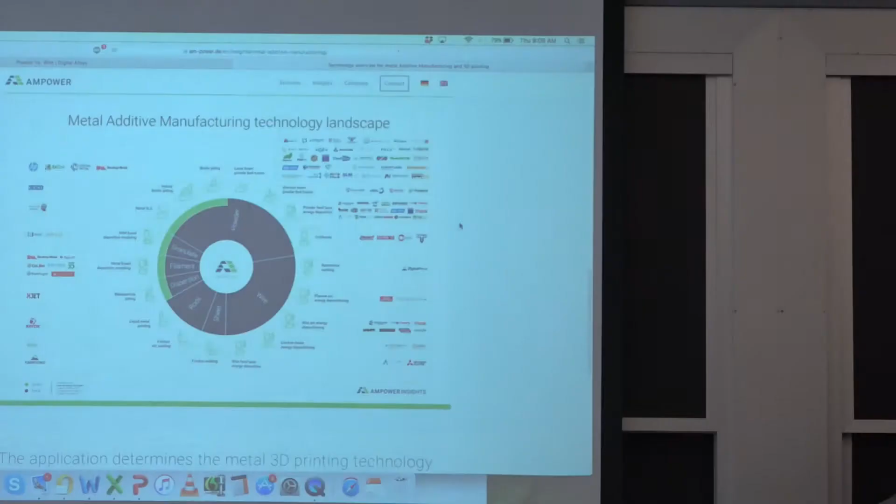We're still sort of in stealth mode, if you will. We haven't fully commercialized the process yet, but we're pretty open to talking about how it works and the markets that we see as immediately attractive for it. So that's a little background. Let me share with you guys an overview of the metal additive space from my mind. Feel free to raise a hand or interrupt me if you have any questions -- I want to make this more of a discussion than me just talking.

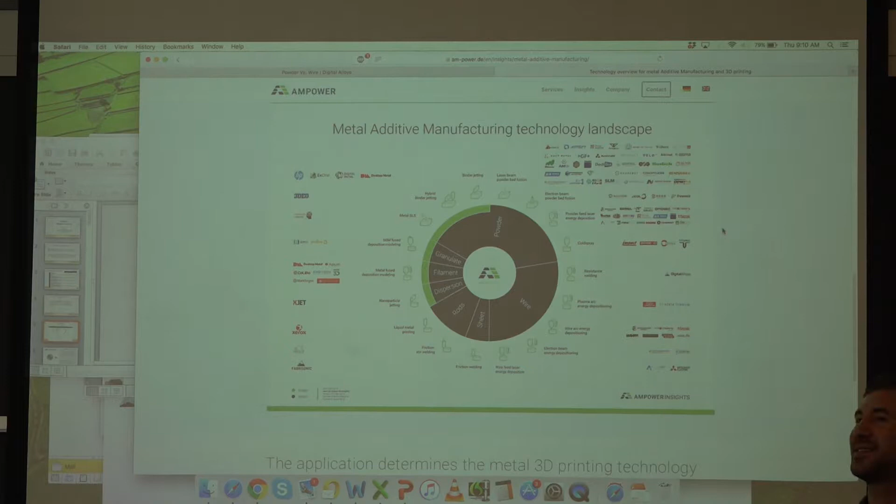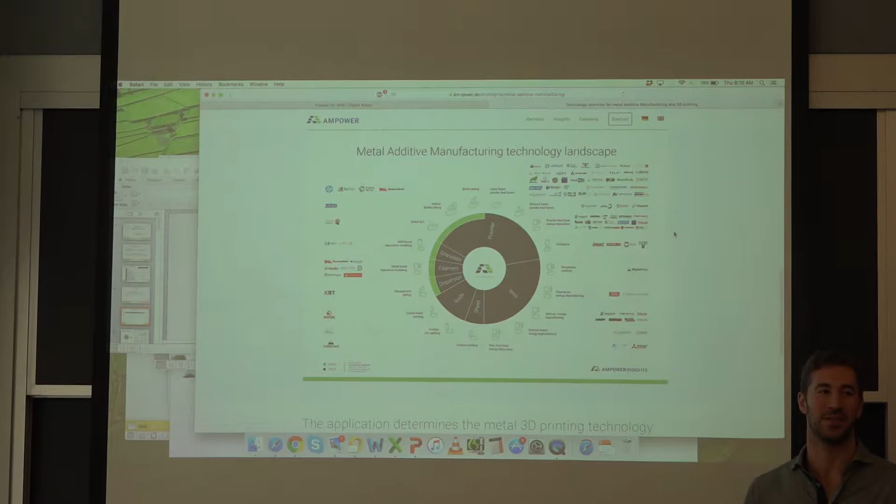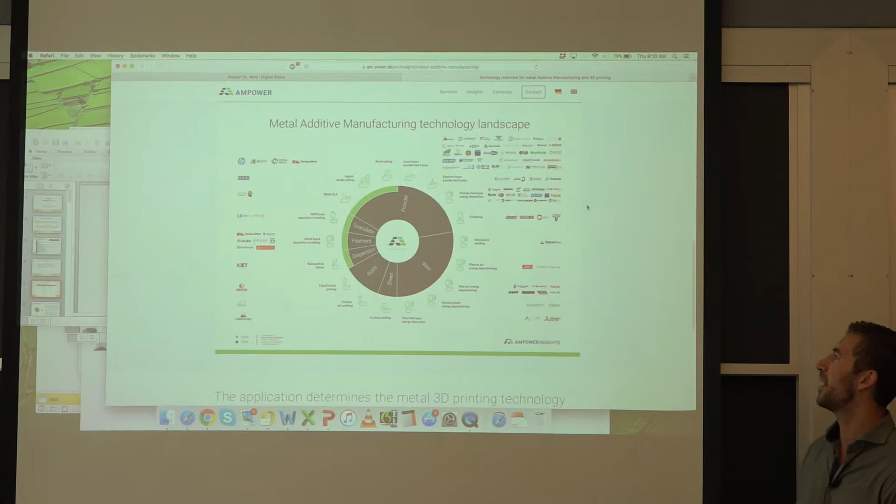A lot of people think about additive manufacturing as just one manufacturing process, one category. Really, it is a lot of different manufacturing processes, and just like in conventional manufacturing, each one has its own pros and cons and applications that make sense for it. When we think about metal additive, there's something like 15 different ways to additively manufacture, 3D print metal. This is from a consulting firm out of Germany that put this together.

I like the way they broke down the different technologies. Starting in the center, the brown represents the metal material. The green represents processes that use metal in combination with a binder, and you can see it's broken down by feedstock. So wire-based processes—a lot of these fall under direct energy deposition, DED. Our process, our logo, is here under this resistance welding category, and I'll get into more of how our process works.

There's powder-based processes—a lot of these were some of the first metal 3D printing processes, officially called 3D printing. Professor Eagar and I were talking about how, in theory, additive manufacturing has been around for 80 years or so, if you consider just welding one layer on top of another. But from the perspective of this new 3D printing industry, it really started with laser powder bed about 20 years ago, out of research in Germany with lasers and powdered metals.

Then there's companies like Desktop Metal, also based in Burlington—neighbors, with a lot of ties to MIT—doing things with binder and metal powder. There are also niche, interesting processes that use large rods of metal doing friction stir welding, basically spinning rods to generate heat to melt the metal in contact with the substrate. And there's things like ultrasonic sheet welding, where you're binding whole layers on top of another. So my point is there's a lot of different ways to process metal under this category of additive manufacturing.

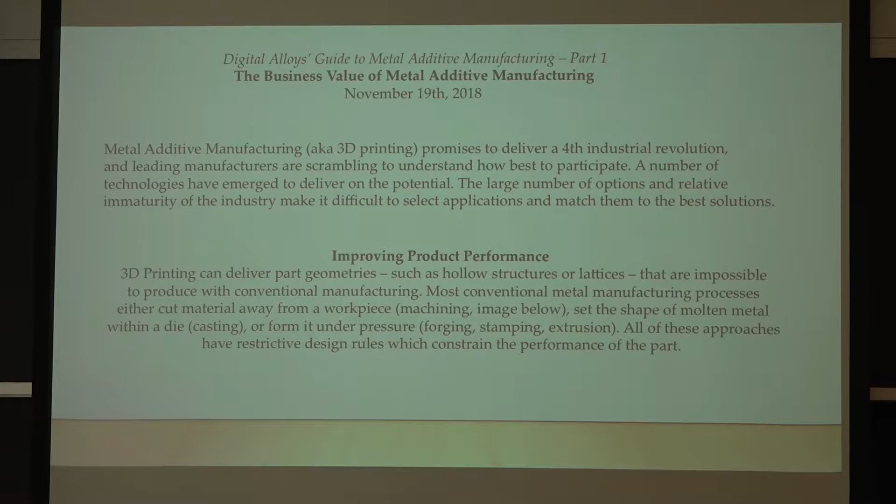Professor Eagar basically grabbed a lot of snapshots from this blog series that I've been writing on behalf of our company for the last year or so. I'll talk through some of the highlights here.

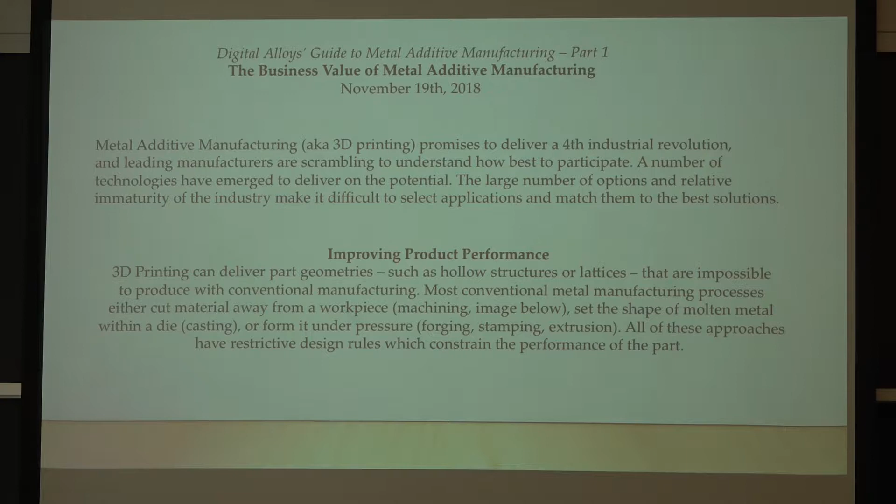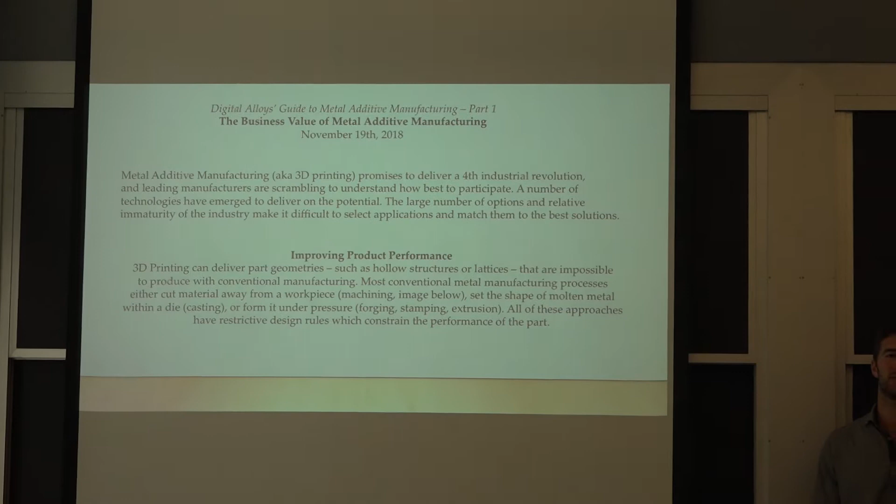Starting with—I think a lot of times when you look at a manufacturing process, from my perspective at least, you really have to start with the business value. What does it do that's unique? What does it do that's valuable? I know that's not necessarily an academic perspective—normally you want to start with how it works and why, and what the physics are.

But from my perspective, working with companies in the industry, everyone is excited by this concept of 3D printing. But at the end of the day, it doesn't really matter if they're not able to use it and it's not able to make some real impact to their business. Coming from that perspective, they really think about 3D printing as another manufacturing process—albeit a newer, more hyped, sexier process—but they think of it as a manufacturing process.

So what are the costs? What materials can it process? What designs can it enable that we couldn't produce before? And how valuable could those designs be to our customers, to our products? And what does the whole process look like—is it something we could really integrate into a factory we're running, or something we'd purchase from a supplier? And just building expertise in the process to understand how it works.

On the topic of value drivers from a business perspective—everyone's using 3D printing for prototyping. Any established company making a physical product today has a handful of 3D printers, and they're all using it early in the design stage to make concept models at least. A good amount are also doing real functional prototyping, assuming they're making a product where there's a technology that can get them close enough to how the final product would be made and function. A lot of companies are also using it for what I'd just call manufacturing tools.

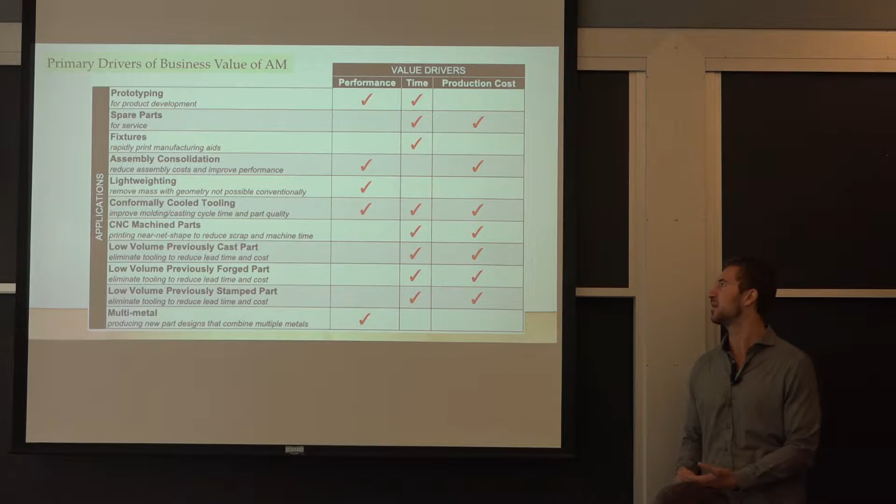And then there's people that are looking for sort of a lot of advanced design that they get from 3D printing. So things like lightweighting are especially important to industries like aerospace, industries like automotive, because the weight of a part is not just the cost of the material that went into it. It's really how that product's going to perform. And there can be a lot of cost savings and performance benefits from removing weight from that part through designs that you can achieve through additive.

Conformally cooled tooling. I guess quick show of hands, does that term mean anything to anyone? A few of you guys. So in a lot of tooling processes, as in injection molding, die casting, are people familiar with those sort of general manufacturing processes? The rate limiting step is really how fast you can cool and solidify the material in a mold. And that sort of largely constrains the economics of the process.

So 3D printing has been used. It's still sort of niche because it's been so expensive, but it's been used and proven quite a few times now in these processes where you can put cooling channels into a part that conform to the surface of the tool, that's why it's called conformally cooled tooling. That allows you to really optimize the cooling, to remove heat from the plastic part in the mold or the metal part in a die as quickly as possible and in a uniform controlled way in order to solidify, finalize that part, pop it out, and start producing the next one.

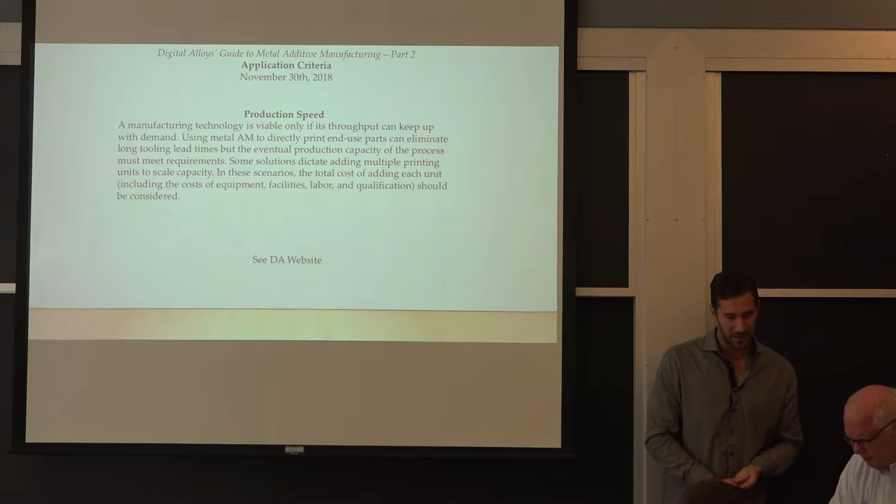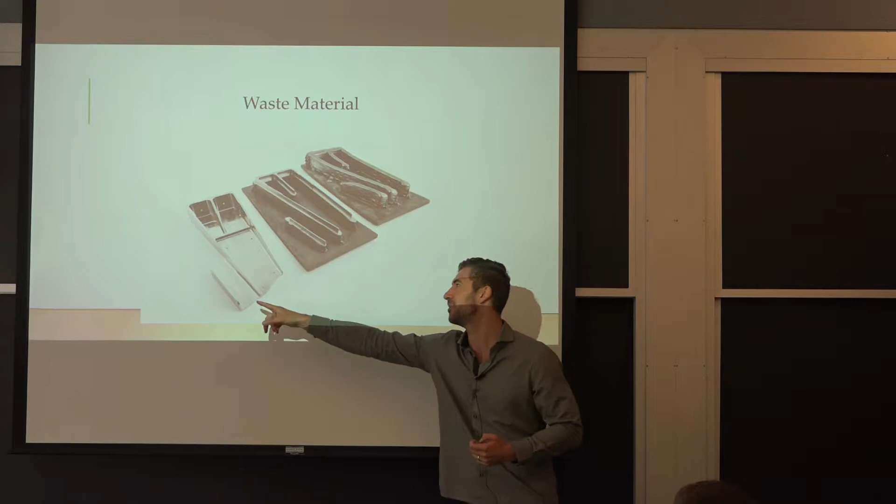Yeah, I don't know if you grabbed that one. But so one reason Boeing invested in us is to think about how they can improve their... Here's a good example of one. To start out with a big block and then machine this part, you can imagine how much waste there is. And so companies like Boeing look at 3D printing as a way to save money, save time potentially. If you can print this faster than you can machine this from billet, potentially there's time savings too.

But also just sort of the environmental footprint. They think about the energy use. There's a ton of energy that goes into producing the primary material, especially with a material like titanium. So if you can reduce a lot of that scrap, you can reduce your energy footprint too. And then of course, if you can make a lighter part that goes into the plane, the energy savings there can be massive. Oh yeah, so that's a good example there.

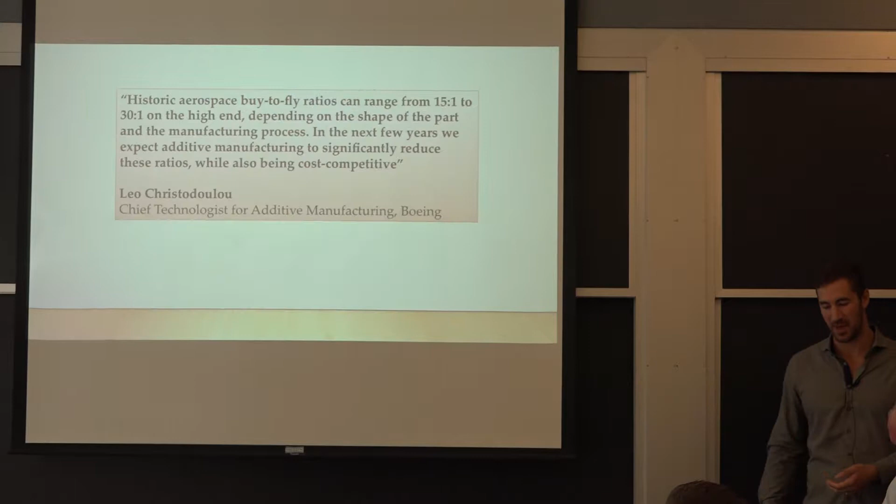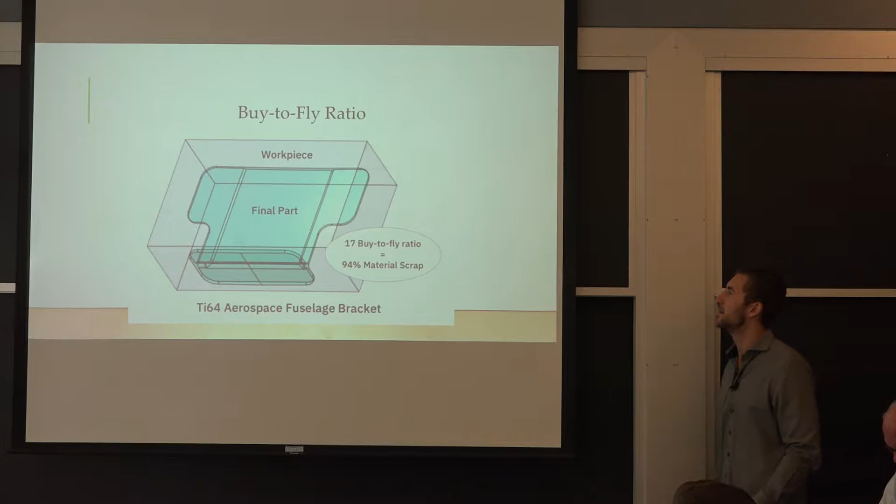Oh, which one? I was just going to say this is a good example of a part that we're working on with a large aerospace manufacturer. And it may seem ridiculous, but a lot of companies, they'll start with this, like a 7-kilogram block, and end up with a half-kilogram part through machining. There's a lot of parts like that on a plane.

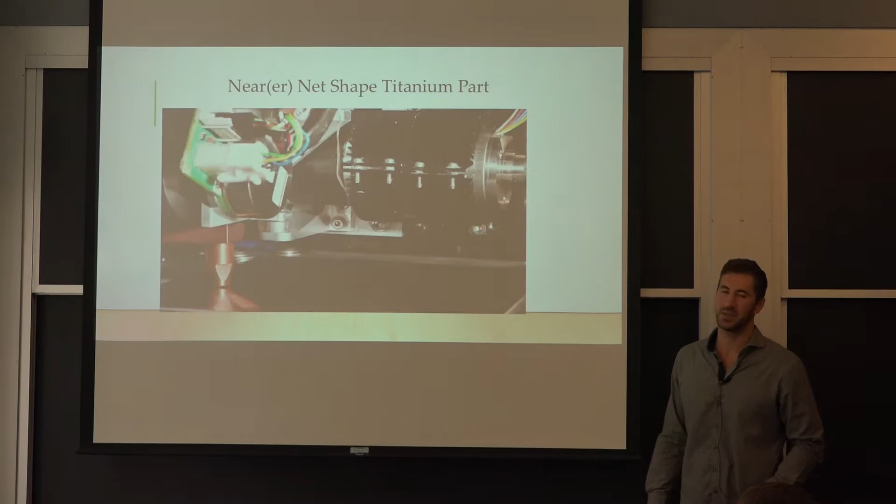Here's your time savings. Yeah, and in terms of time savings, to think about CNC machining, you not only have to develop a program to make the final part, to control that end mill, but you also have to develop some pretty complex tooling to hold that part while you're machining it. And so it's sort of a two-step process. And it's a lot of programming, a lot of design, and a lot of just waiting to receive materials, waiting for materials to be machined.

It's kind of like a chicken or egg thing. You have to machine a fixture to hold your part before you can machine the actual part. And so it's not an efficient process. It is a process that can get you to a very accurate, valuable part at the end of the process. And it's used in conjunction with a lot of processes because it can produce very smooth surfaces and accurate features.

There's a question over here. Yeah, I'm curious, so you mentioned like a big box of titanium. I agree you can definitely buy that stock. Is it easy to buy huge amounts of titanium wire stock? Like what else is it used for? Because it probably wasn't developed for your process.

Yeah, good question. So I haven't really got into our process yet, but titanium wire, thanks to the welding industry, is something that is what we call commercial off the shelf. It's used by a lot of manufacturers currently to do welding and joining and repairing operations. So that's like titanium filler for some other TIG or MIG welding process? Exactly. So you can buy big spools of this stuff from hundreds of different manufacturers. It is more expensive than billet.

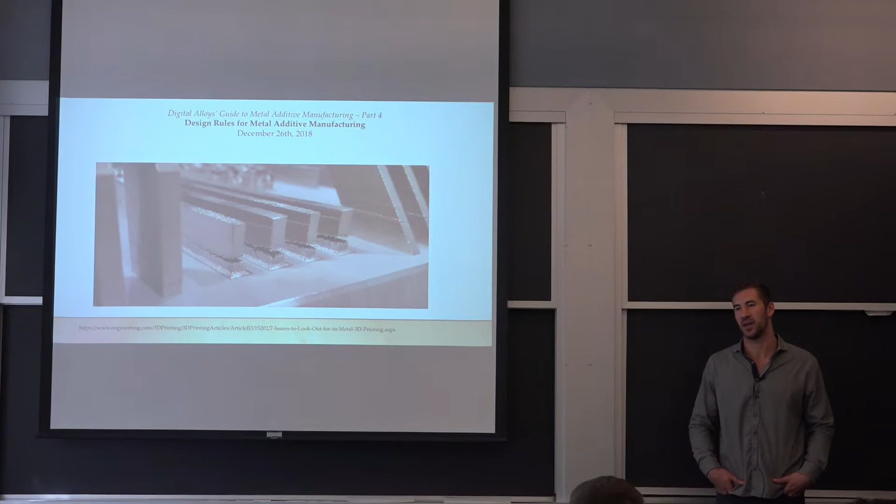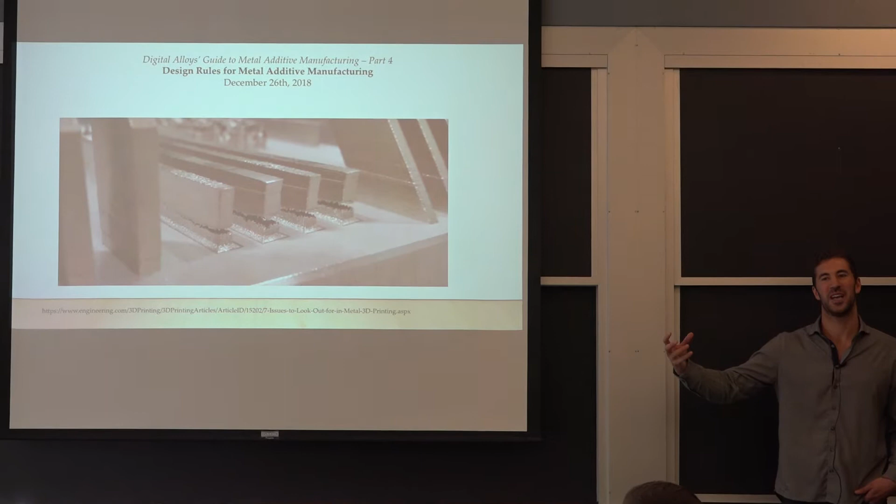There it was. Anyway. So let's talk a little bit about some of the different processes and the thermal management component of it. This is a huge thing in metal, in any manufacturing, but especially in 3D printing. When you're melting metal, it expands, and when you cool it, it contracts. And when you have one section of your part that's very hot and one that's very cold, you start to deal with a lot of internal stresses. With a lot of additive manufacturing processes, parts will literally tear themselves in half, especially along layer lines where there may not be great fusion and strength.

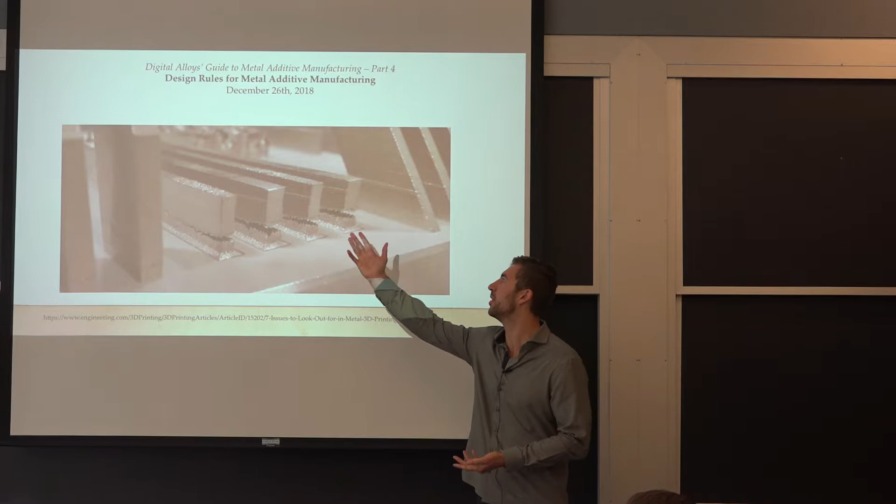So this is an example that's not atypical in 3D printing, where you'll have a powder bed build that will tear itself apart, and so this is a large factor when you're thinking about how to design parts for the process, how to orient parts within a build, how to support them and how to optimize parameters for a build. Different metal additive manufacturing processes create different amounts of heat loads and residual stresses like this. Another factor with thermal management is the effect on the grain structure and the crystals in the final metal part.

A lot of really high energy processes will start to see what is called columnar grains, where a lot of heat penetrating into the part will create anisotropic crystal structures, which most industries do not want to see. Someone like Boeing wants a part that is isotropic, equal strength, equal properties in all directions, because it's easier to design for and easier to validate. It's one of these dirty secrets about 3D printing that a lot of people don't talk about, but people that use the technology are very aware of it. Yeah? So I would assume that some materials are more sensitive to variation from process to process type.

Yeah, in microstructure, can you comment on that? Yeah, I'm not an expert there from a metallurgical perspective. Some materials, there's a reason why a lot of materials just have not been printed, and probably cannot be printed with a lot of processes.

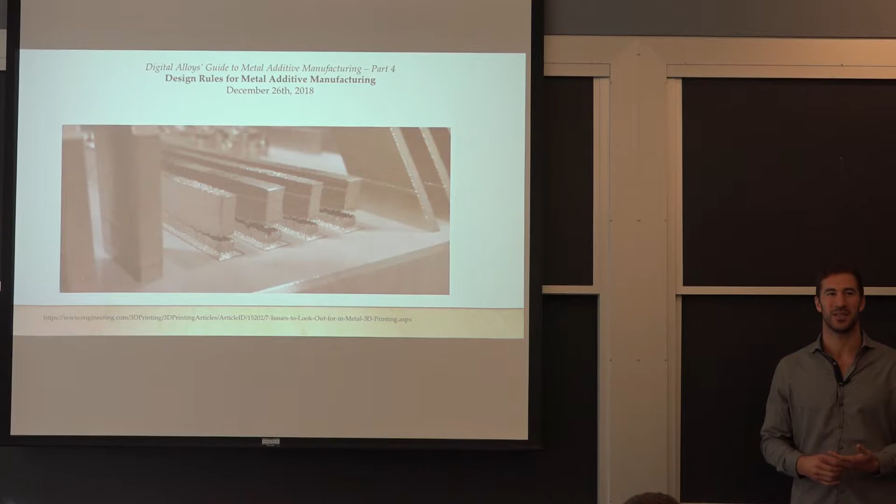When you look at aluminum, one of the most widely used materials, powder bed processes have really only been able to process casting grades of aluminum, which are typically lower strength. They haven't been able to process typical aerospace grade high strength aluminums because of issues with cracking and this kind of thing. Do you have anything to add to that?

It gets very metal specific. Steels are not a problem, but most steels are not going to be the high value added parts unless you're getting to high alloy steels. In fact, you might want to mention something about your tool steel type of stuff.

Titanium is certainly a niche in the medical business and the aerospace business. Nickel alloys that are high value added alloys cost $200 a pound anyway, and they're going into high temperature applications. So you really have to look at the metallurgy of the whole thing before you even start.

Frankly, that's one of the problems with people who are trying to do carbon steels or brass eyeglass hinges. There's just not enough value in those metals to be able to justify the expense of pixel by pixel manufacturing. Yeah, so why don't I use that as a good segue to explain what we're doing.

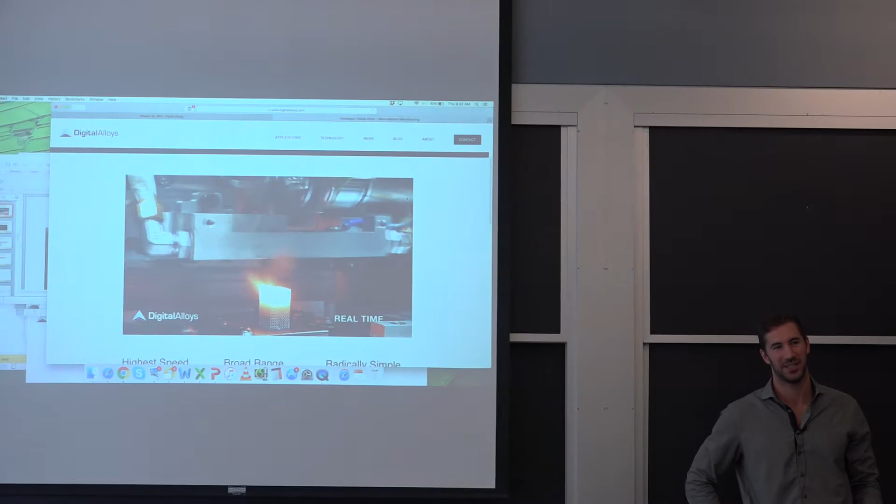How it works, and how we're thinking about the applications and industry and adoption of this technology. So at Digital Alloys, we've created a new metal manufacturing process called Joule printing. We call it Joule printing because Joule, a unit of energy, because of the translation from Joule heating, basically resistive heating, just like a coil in a toaster.

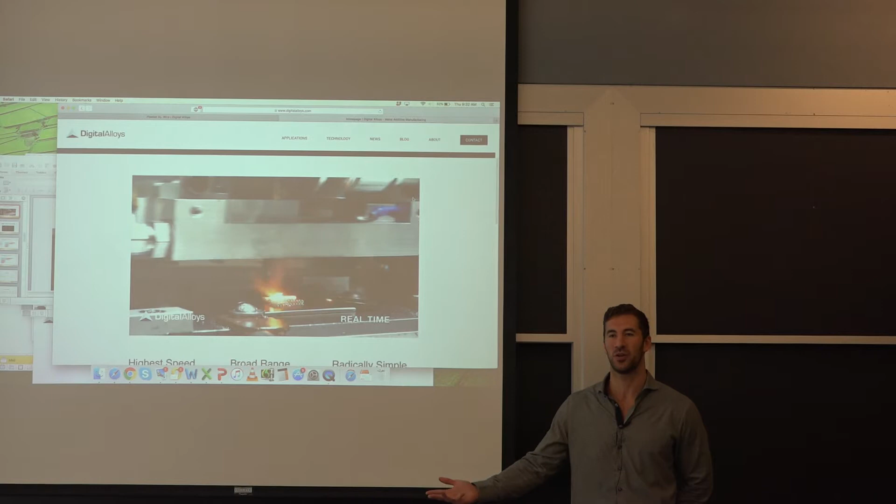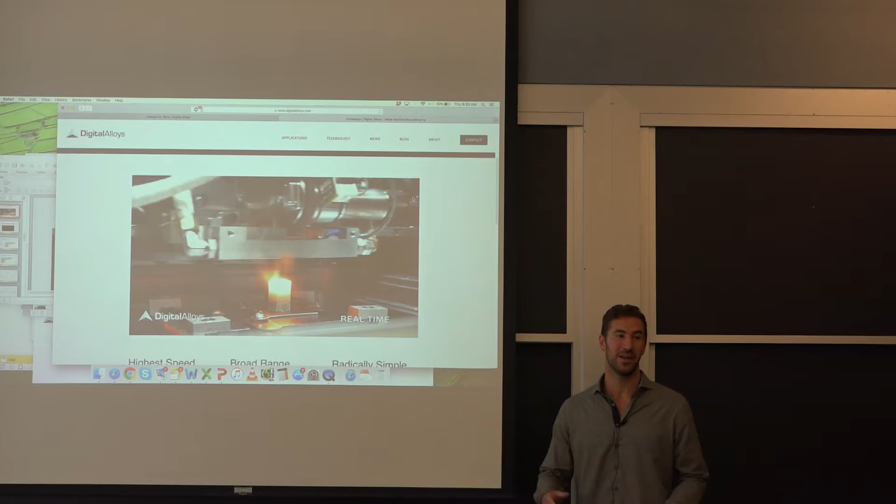We take a welding wire, which we discussed earlier, which is great because you can find it in a lot of different metals. A lot of people manufacture it, you can get high quality, low cost. Compared to powders, which is how most metal additive manufacturing is done, it's a lot safer. A lot of companies don't like dealing with powdered metal because it's a risk of inhalation, a risk of flammability because of the really high surface area, and it's prone to oxidation.

I'm curious, is this actually a titanium part you're printing right now, or is it some other material? Yeah, this is titanium. Is this done in an oxygen-free environment, or in the atmosphere? So what you don't see is the bigger printer behind this. This is in argon. So we have a chamber, and we purge it with argon.

Would it be on fire otherwise? Yeah, it would be heavily oxidized. You'd lose a lot of strength in the material, it would look funky colors. I don't know if it would catch on fire, but it could, maybe, if there's some oxygen in there. If it was powder, you could start a flare in there and just burn the whole glove box down.

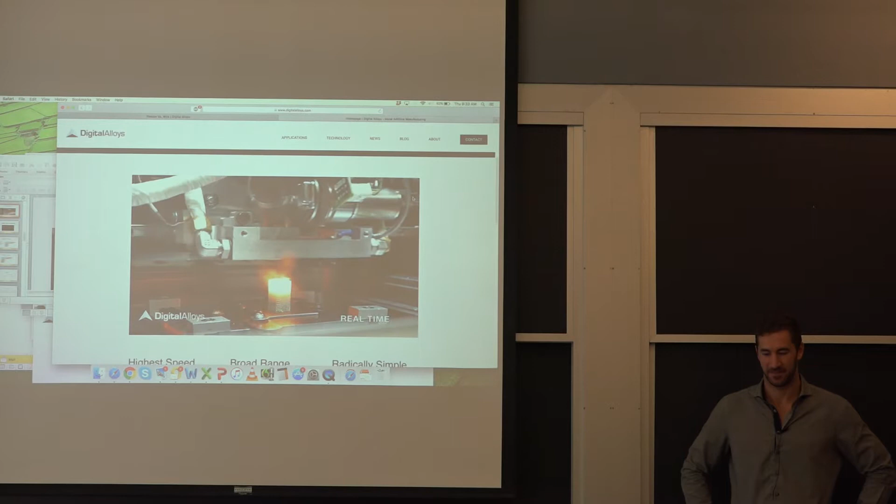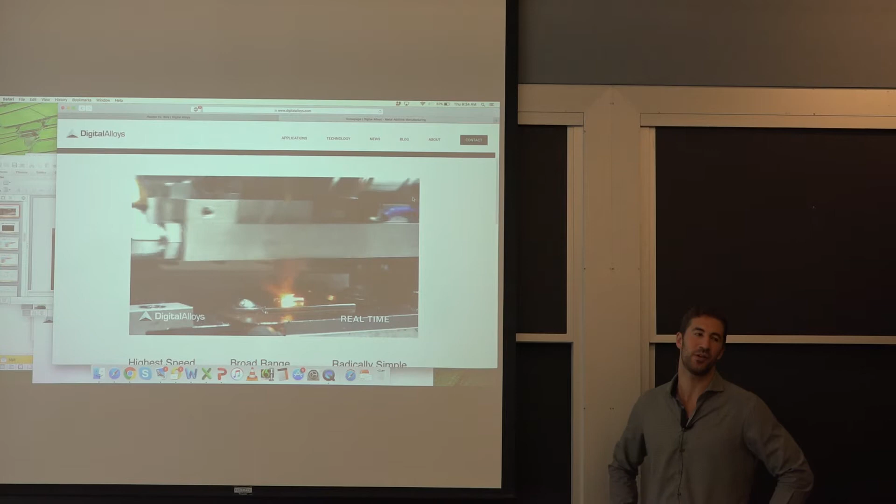As you can see, it gets very hot on top, and titanium has a very low thermal conduction. Do you have any issues getting the heat out of the part? Like you could have some super long, narrow part that just stays super, super hot and doesn't shed heat. Yeah, it's a big part of our development right now, figuring out thermal management.

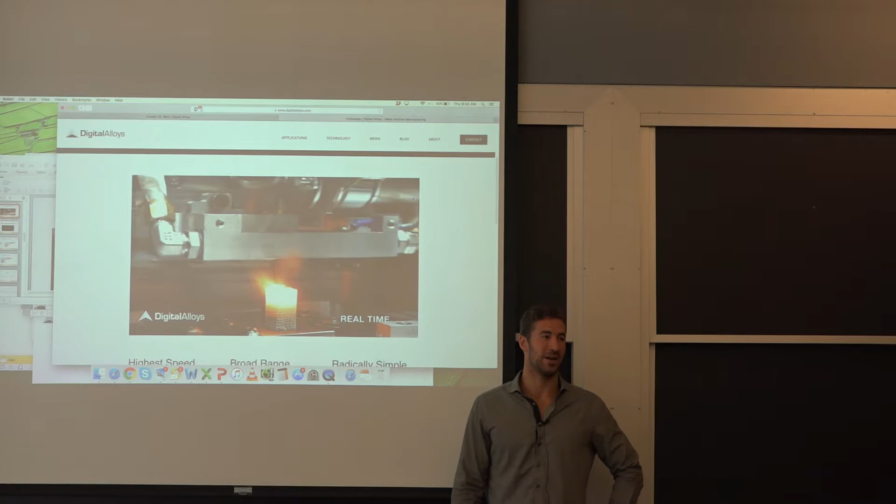A lot of times it's figuring out, what you see here is what we call printing on a cold plate, so it's just room temperature, ambient environment. It's really hard to get good fusion to a cold plate with molten metal. So we're playing with ideas like, do you heat up the plate, do you heat up the whole chamber to maintain that thermal environment and reduce the thermal gradients? Frankly, it's something we're still figuring out, and it's very geometry specific, like you said.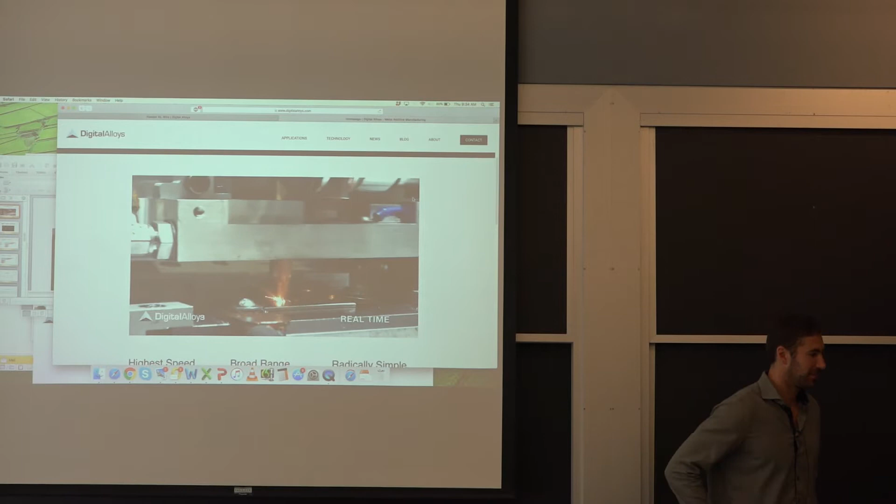In fact, I originally thought one of the big problems was going to be getting the heat out. But when they started doing this about a year or 15 months ago, the big problem was they didn't have enough heat in. So it just radiates too fast? The metal has too much thermal conductivity, it sucks the heat out, and so they weren't getting good fusion. They were getting porosity in the final part, between the layers.

And it turns out, it amazes me that you can have a machine that slews that fast, but they just sped up the machine to go faster, and they solved the heat problem. And so now they can get 100% dense.

But again, you're going to have some problems with residual stresses eventually. They could not make that as a 6-inch by 6-inch part without getting cracking. Not today, not without really heating up the whole environment and the plate.

We have, I guess, a good problem compared to the opposite: the faster we print, the easier it is, because we're printing on hotter metal essentially. With most manufacturing processes, the faster you try to go, the more complications arise. With our process, it's very hard to print slow because it's hard to print on a cold surface. It's hard to get good fusion, and it's hard to dump that much energy into the process without destabilizing it. That's why we like materials like titanium, because they have low conductivity of heat.

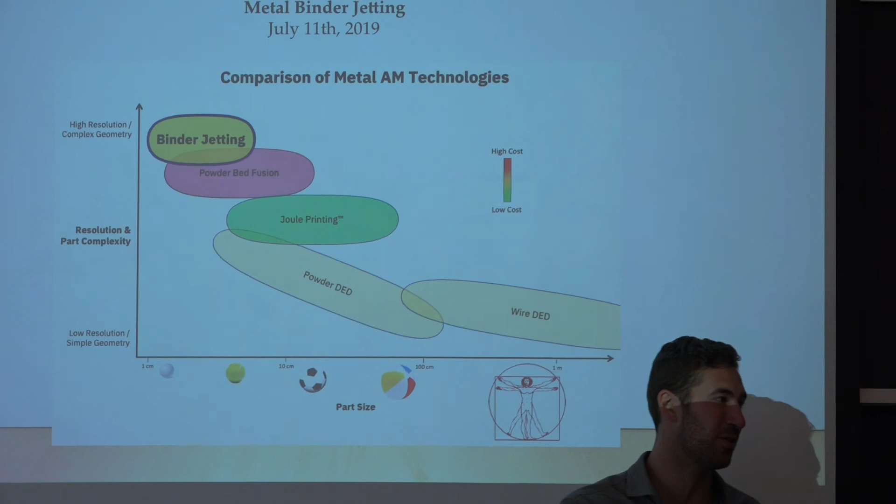Right now our first printer we think makes sense for parts between the size of a tennis ball and a beach ball. You look at a company like Desktop Metal and their binder jetting, and we think it makes sense for much smaller, thinner parts, because you've got to remove all that binder and then get it down to density. Then you have your bigger, more welding-type processes where you're laying down a hot-dog sized bead of metal in some cases, where it's only going to make sense for big, simple, large structures, mostly aerospace and industrial structures.

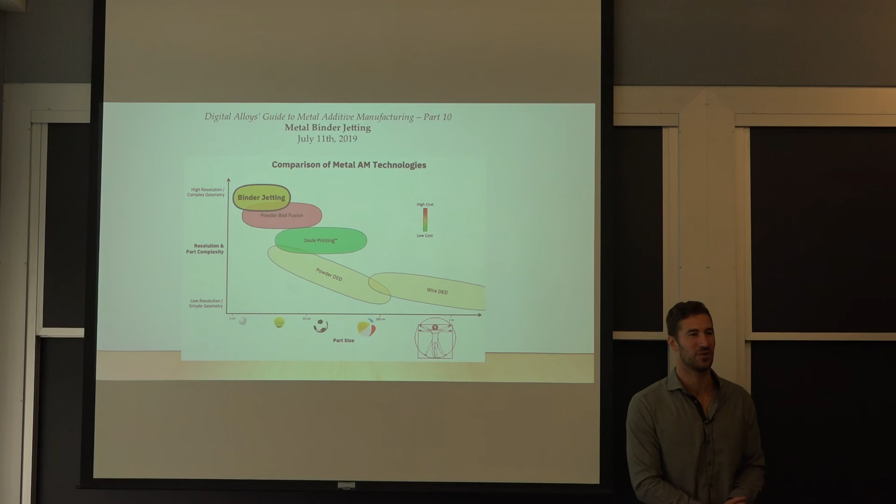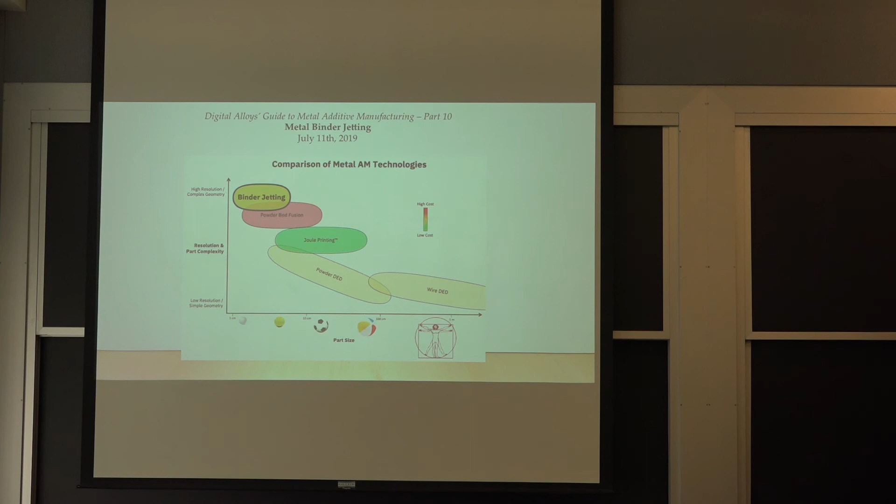If you wanted to push your volume up to a larger scale, could you do it with a larger wire, or would you just run out of heat input? We think we could even do it with a current wire. It's just that you have to start somewhere, right? We had to build a machine starting somewhere. We chose a size that we thought was a nice sweet spot that wasn't well addressed with current technologies. We're also solving a lot of the thermal management issues around how you maintain heat in that part. I mentioned we use an argon environment. If you try to build a really big chamber, it's going to be really expensive to purge with argon. So you have to think about local shielding, or printing in a vacuum, factors like that too. Eventually, yeah, we think it'll scale, but it's going to take time.